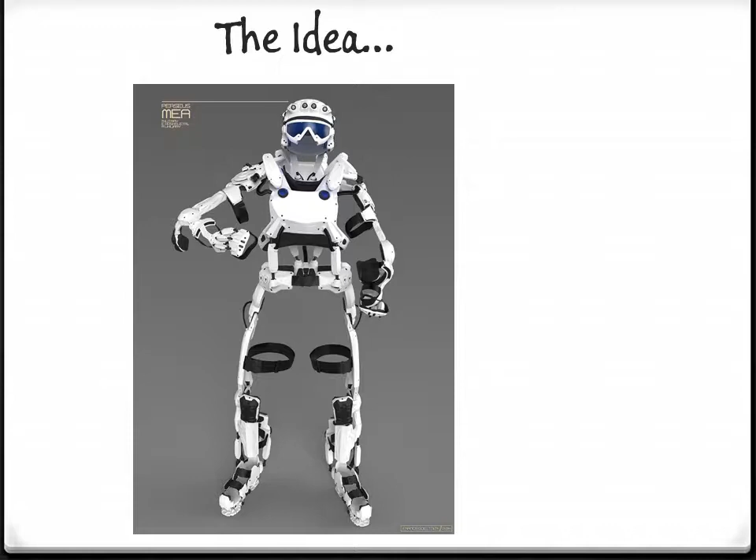Okay, maybe not Iron Man, something more like an exoskeleton that an army would make. But we couldn't do the entire exoskeleton, so we had to pick a single limb. And to make it interesting, we wanted an arm to golf.

Our system is comprised of two components, a rigid arm made of steel and a golf club. Both of those are connected with a pivot, and the whole system is powered with a DC motor. The motor and the pivot have K and B coefficients, with the K being the spring and the B correlating to the damper.

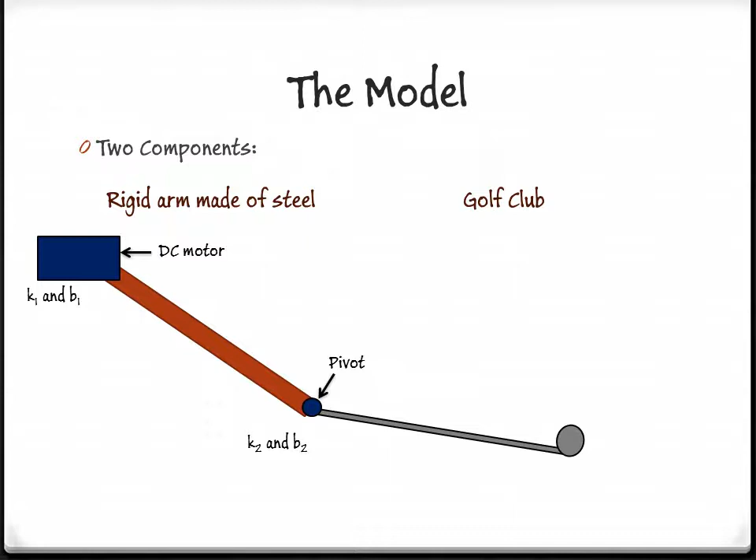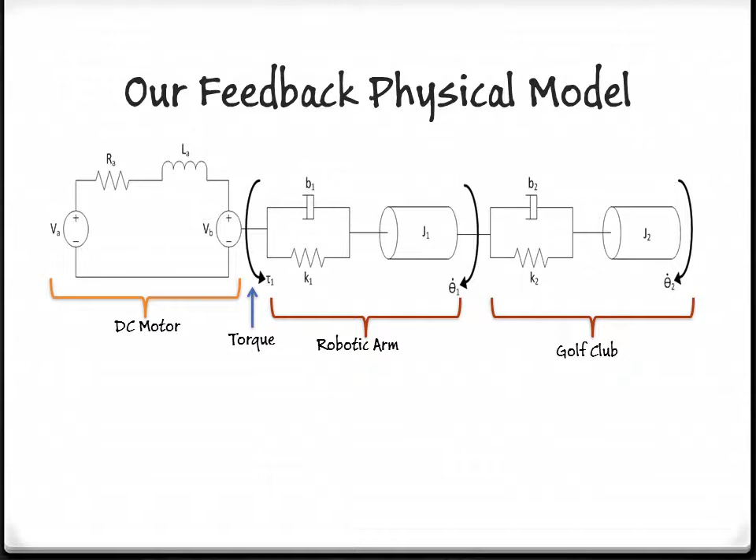Here we have a model of our physical system. We start with the DC motor, which then creates a torque across the robotic arm, which is then connected to the golf club. The model of this system, specifically the robotic arm and the golf club, can be shown as an impedance network. This has a torque input and the damper and spring coefficients along with the mass built in.

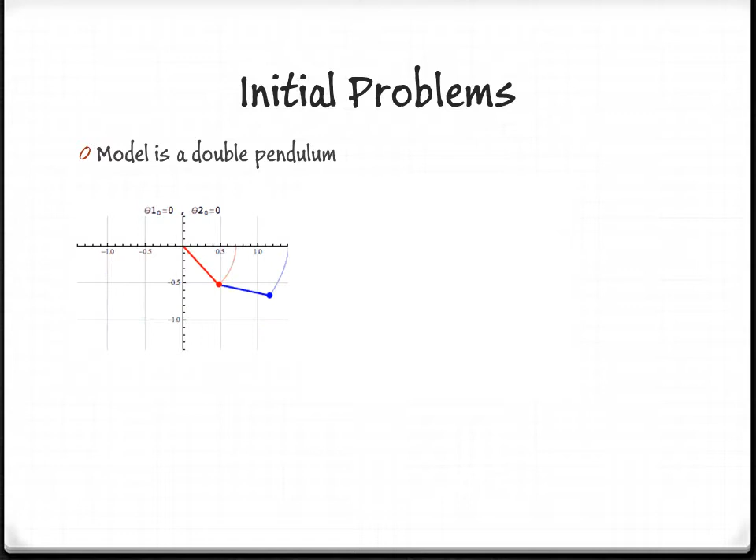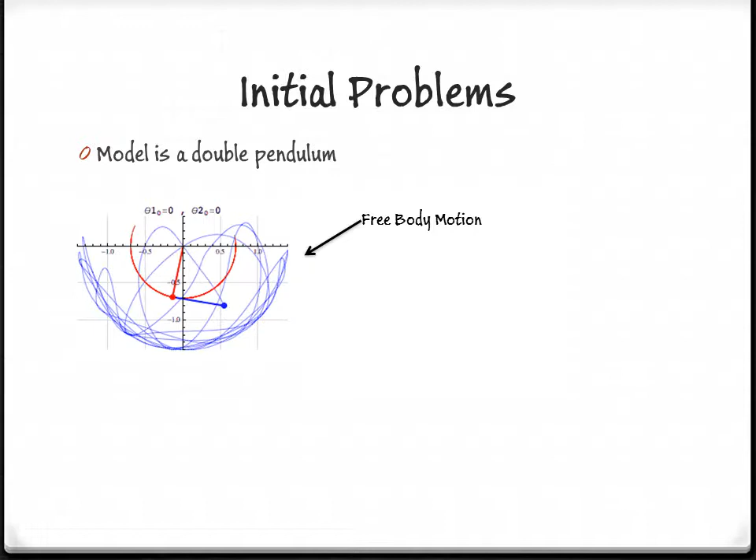We ran into a few initial problems when modeling the system. First off, the model is a double pendulum, which as you can see, there's a lot of free body motion between the two arms. This motion is extremely chaotic and nonlinear and therefore hard to analyze, so we had to linearize it. The two equations shown are the dynamics of the two different arms. We could not take these two equations and implement them into our system because they both assume free body motion. Therefore, we had to further simplify the equation.

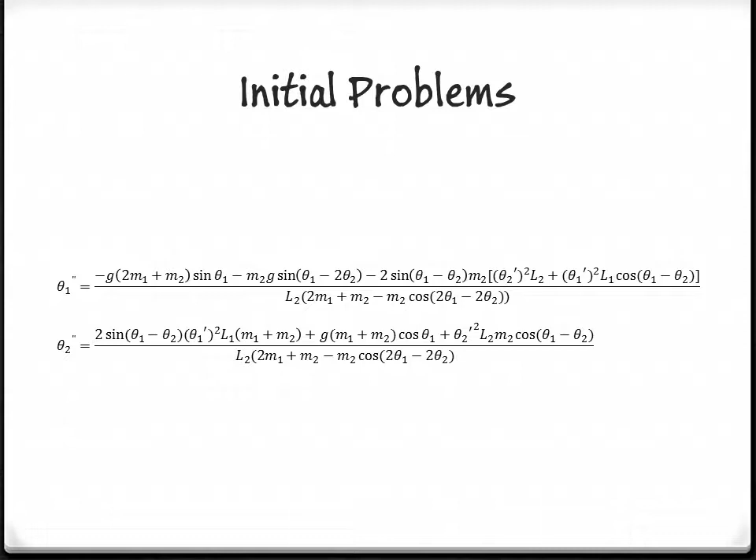In order to linearize the system, we had to simplify the dynamics. The first assumption we made, we found out later upon further study, was not valid. Therefore, we made a new assumption that took the small angle theorem into account. This makes sure that the angle between the two arms is kept small. Using this allowed us to simplify our plant model and the transfer function into a linear system.

This is the block diagram of our system. Everything we've showed you up to this point is the plant, the G of S. In the feedback loop, we also have the DC motor, as well as the PID controller, all looped together with the feedback.

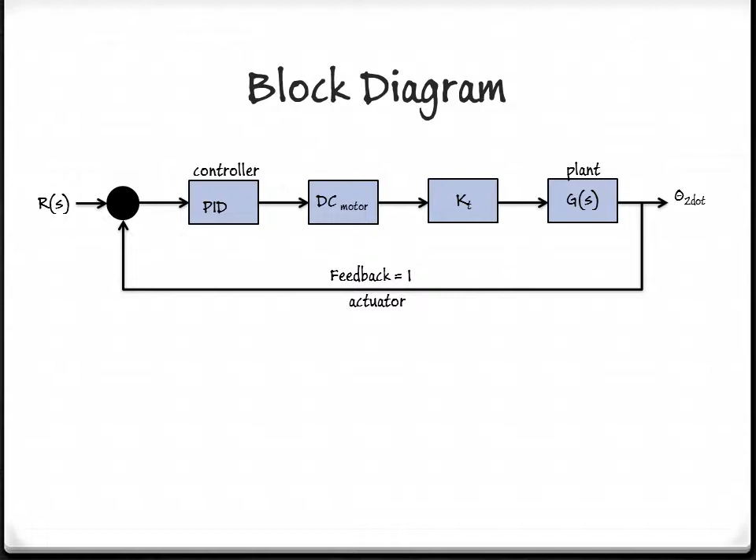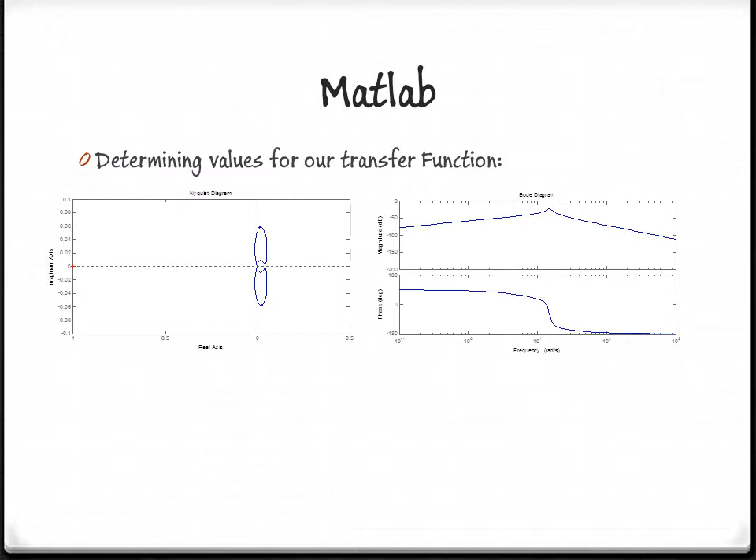This next MATLAB plot shows the new transfer function of the closed loop. The dotted line on the very bottom of the graph shows the original output. Once a PID controller with a very large integrator is added, you get the new transfer function shown by the solid line. This step function has a rise time of 0.234 seconds. This is important because with the swing of a golf club, we need to get to our desired velocity as quick as possible, or under 0.6 seconds, which is our design specification.

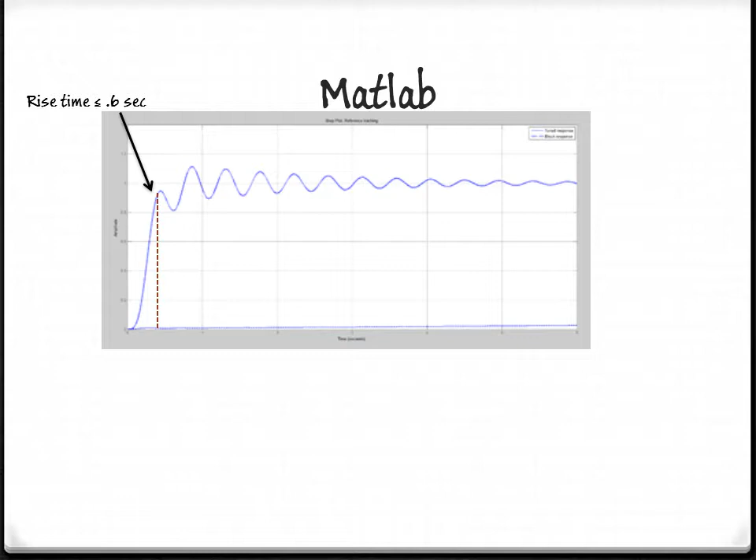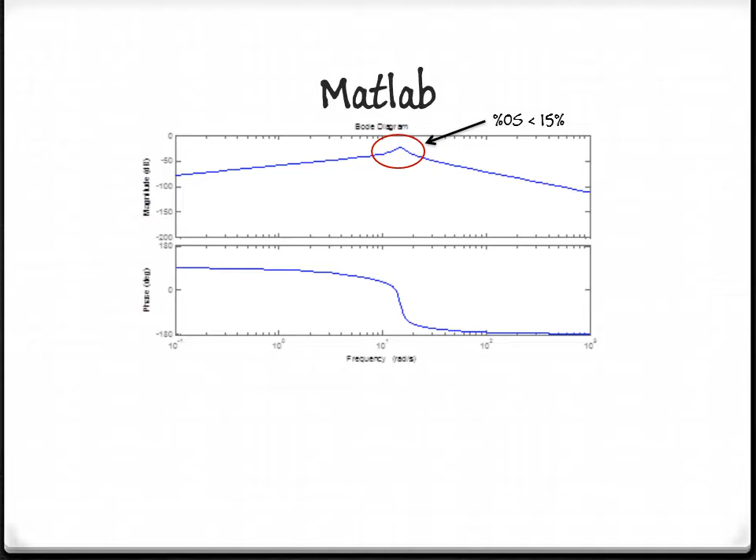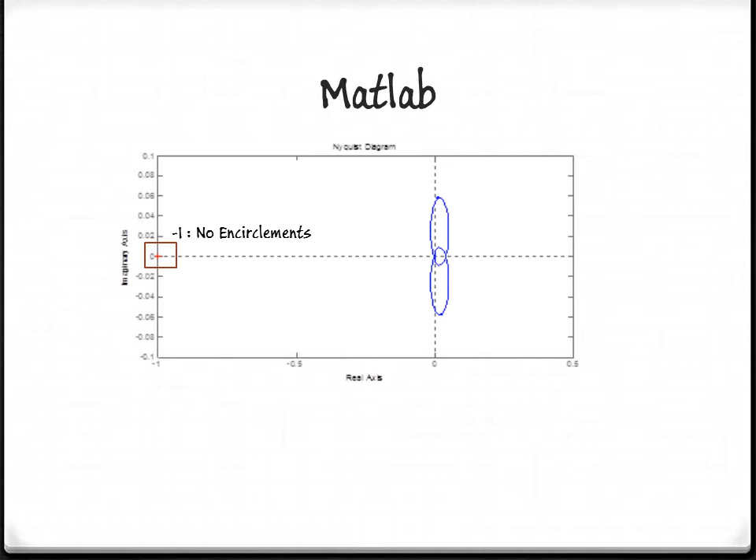From the Bode plot, we can see that eta is small. This correlates to a small percent overshoot. When the calculations are done, we can find that our percent overshoot is within our specification. For our system, all our poles are stable, and the Nyquist plot does not encircle -1. From this, we can say that our system is BIBO stable.

In the Simulink block diagram, there are 3 feedback loops. The first loop, marked in orange, is the feedback loop for the angular velocity of the upper arm. The second feedback loop, marked in blue, consists of a gain and a compensator. The compensator is necessary because it accounts for the zero and double pole of the theta2 over theta1 transfer function. The third feedback loop allows us to compare the desired angular velocity with the output velocity. It achieves the goal of the system.

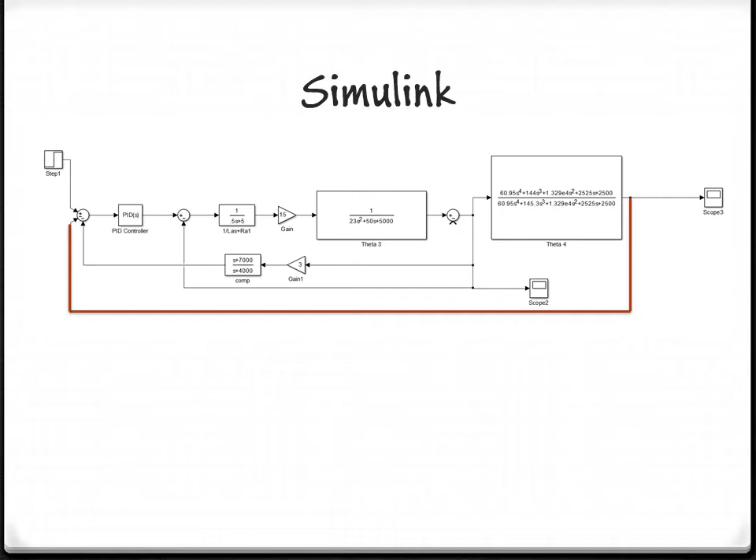In order to come up with this Simulink diagram and the transfer functions that we used, we had to make a few assumptions. First, because the second arm is considered rigid to the first, but still in free motion, we decided to assume that the motion of the first arm is only affected by the motor, and not by the second arm. The second arm, however, is affected by the motor and the first arm. From here, we had to solve for theta2 over torque, and then divide by theta1 over torque to get the transfer function of theta2 over theta1.

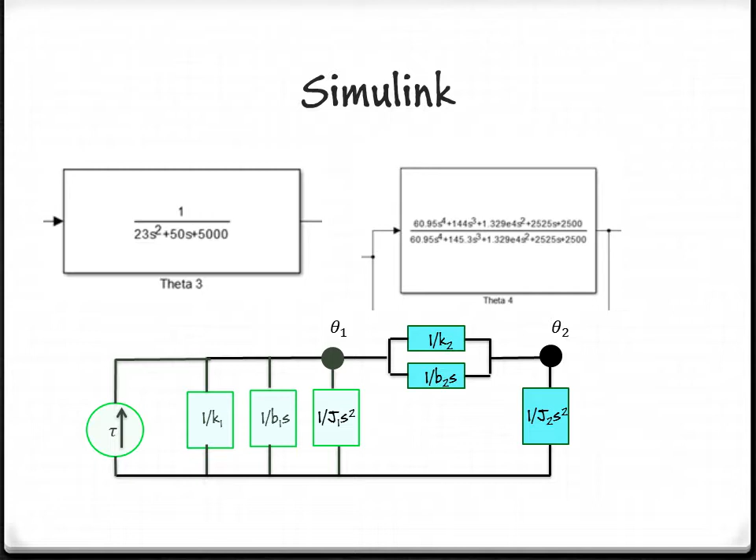In order to make our system match specifications, a PID controller was added. Inside of the PID controller are 4 variables: a proportional, integrator, derivative, and numerical constant. The PID controls how fast the system responds, how much overshoot there is, and the oscillation of the system. The proportional controller increases the response to the system, but increases the overshoot as well. Also, it includes an error. The integrator term does a similar role as proportional, but doesn't have the steady state error. Finally, the derivative term helps with stability and settling time.

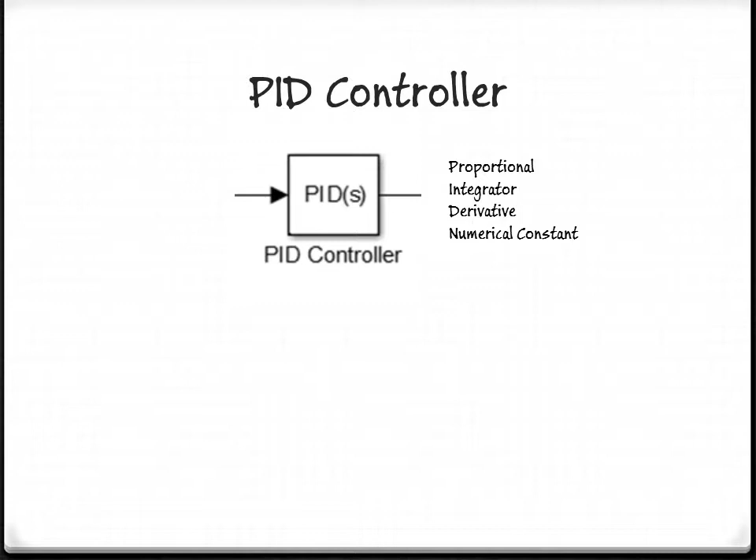Our system needed to get a rise time of less than 0.6 seconds and have an overshoot of no more than 15%. This allows the golf club to hit the ball at a range of speeds which would be deemed appropriate for a skilled golfer. Our project needed to increase its rise time, but with an oscillation around the desired output. Therefore, we decided to go with the integrator term instead of a proportional term. So in the PID controller, the P term is set to 0, and the integrator term is very high.

Because the system doesn't need to settle and be constant, the need for a derivative term was negligible, so it is set to 0. In turn, this means the N constant doesn't matter. When this was run, we got a rise time of 0.234 seconds and a percent overshoot of 11.3%, meaning we met our specifications.

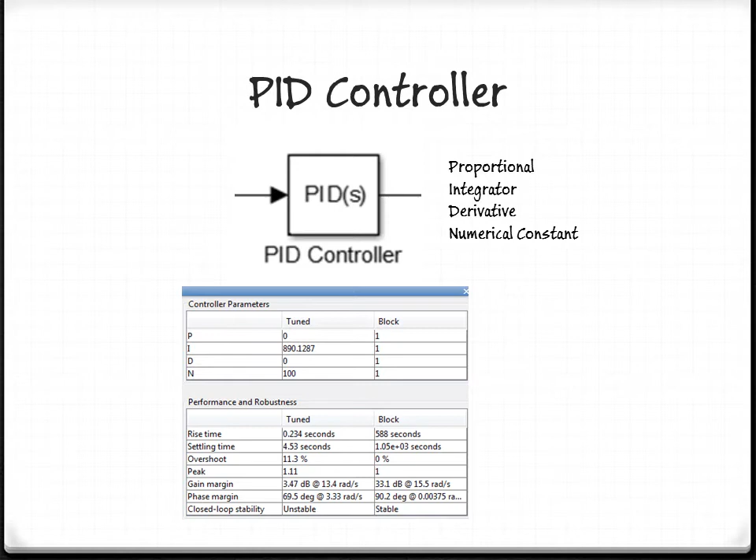However, our robot should not and could not work in real life. First, it is uneconomical. The controller would have to have a crazy high integrator, which could be expensive. Second, the dynamics behind the robot are incorrect. We made assumptions to make the system easier to handle. Third, there needs to be experimental testing before any constants can be set in stone, such as B2, K2, and J2. Finally, there is no braking system for after the club hits the golf ball, which can be extremely dangerous. In conclusion, this data should not be used in real life.